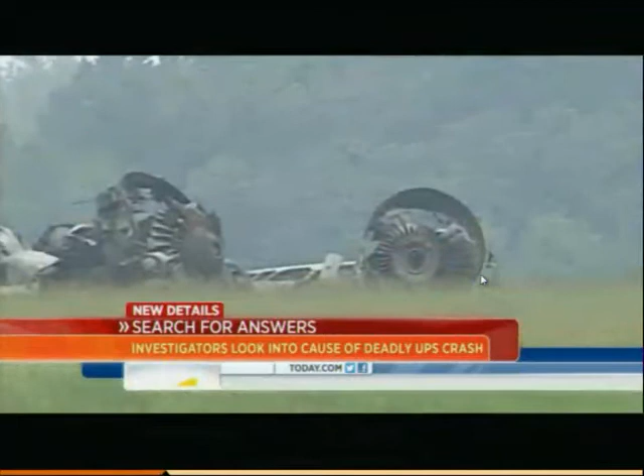Quiet, please. The NTSB was unable to retrieve the black boxes yesterday because the plane was still smoldering, but they hope to retrieve them this morning and fly them back to Washington for analysis. In the pre-dawn sky in Birmingham, fire and smoke as UPS cargo flight 1354 crashed and burned roughly half a mile short of the runway. The pilot and co-pilot never made it out alive. Seconds before the crash, witnesses thought they heard the engines sputtering or backfiring. It flew so close to our house, when we heard the bang it shook the house. So it was quite terrifying. I seen the sky lighting up orange. When I seen the plane on fire, I thought he's not going to make it. The tower reports no distress calls from the pilots. The fire that consumed the aircraft, intense. We have not been able to get in and get the black boxes, the cockpit voice recorder, the flight data recorder. Investigators hope those recorders will help them understand what went wrong. The plane involved was an Airbus A300 built in 2003 with just 11,000 flight hours, logged over 6,800 flights. The A300 was first built in 1972.

While it generally has a good safety record, there have been dozens of incidents and accidents worldwide involving hundreds of fatalities, including the crash of American Flight 587 in New York in 2001. Among the questions for investigators: did the cargo shift on the UPS plane? A cargo shift was blamed on a cargo plane crash in Afghanistan earlier this year. And was the crew well rested? New FAA pilot rest requirements only apply to airline pilots, not cargo pilots. Regardless of what kind of airplane you're flying, fatigue is fatigue, and the same sorts of protections need to be in place, and that includes the cargo industry. In a statement, UPS says we place utmost importance on the safety of our employees, our customers, and the communities we serve. Investigators will also be looking closely at the cargo itself that was being carried. Did it contribute to the crash in any way? Three years ago, a UPS crash in Dubai was blamed on a shipment of lithium batteries that overheated and caught fire in flight. So there's still many more questions this morning, far more than answers, and UPS is promising to fully cooperate with the investigation.

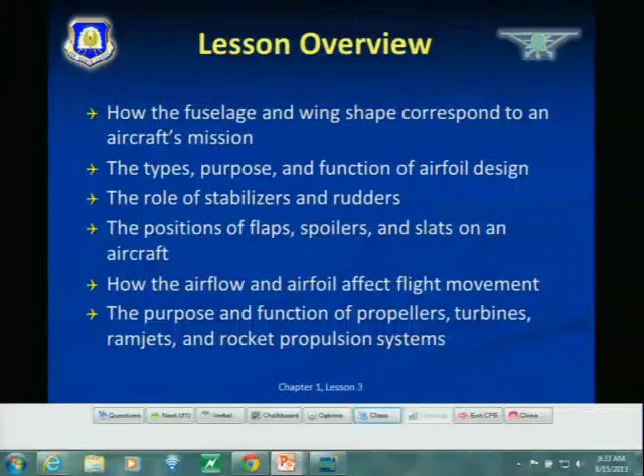Overview here. We can go through the different parts of the aircraft, why it flies and how it flies as far as lift, drag, thrust, and weight. But now we're going to see how you adjust the aircraft to optimize those forces of flight. We're going to talk about what a spoiler is, or a flap, and how it changes the aircraft shape to optimize the flight.

Here's one of the first things you need to know: the fuselage. The fuselage is the main body of the aircraft.

Let's look over here at the wall at all those aircraft I have up there. What is the weirdest looking fuselage of all those aircraft? The left one, the B2, the bat wing. That looks pretty cool. What about the Wright Flyer? Yeah, the left one. Not much of a fuselage.

One of the unusual things about the Wright Flyer is that when you deal with other aircraft, the elevator that controls the up and down motion, the pitch, is in the back of the plane. Back of the plane. But the first Wright Flyer has it in the front of the plane. That was one of the only differences in their plane versus ours. It made it more unstable, very pitch sensitive, since the front of the plane had the pitch control, which is kind of unusual. So you're actually landing and pointing forward. Also, there are no flaps and no spoilers on here.

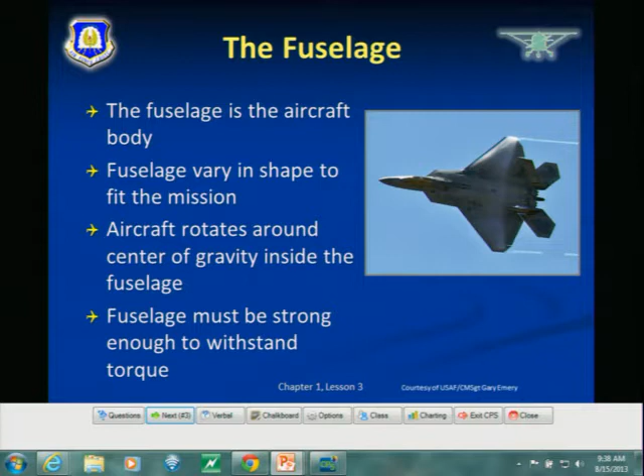That's a good question. What is torque? What does that word mean? Twisting or rotation, exactly. When it says the fuselage must be strong enough to withstand torque, how much torque does a cargo plane coming in to land have? Not as much as a fighter, right? A fighter is going to be turning and bombing and dropping stuff off the plane. So the fuselage does have to withstand a lot of the movement of the entire aircraft.

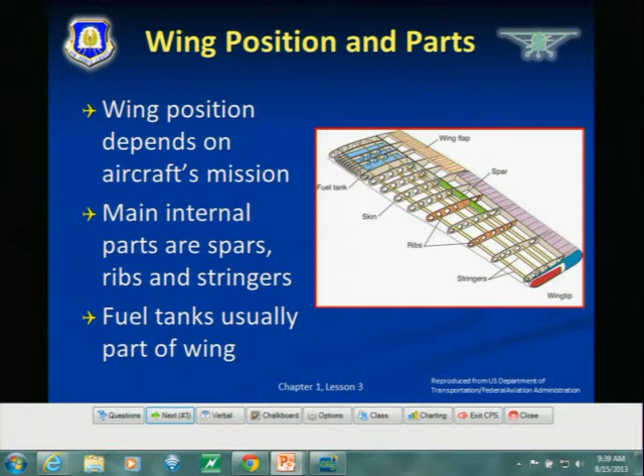If you look at some of these planes up here, like the B-2, look how skinny it is—all those wings have fuel in them. Look at the C-47 on the Berlin airlift in the middle. If you're carrying cargo in the fuselage, there's no other place to put the fuel than in the wings. The air refueling planes have huge tanks in the cargo area which transfer fuel out to the planes they're refueling.

Wing size. How does wing size affect the weight, guys? If it's a really light plane, it doesn't have to have big wings. Exactly. So then if you have a lot more weight, your wings have to get bigger, right?

And how about a glider? Why does a glider have big wings then? The bigger the wing, the more lift you have. Bigger wing, more lift. Does anybody here do gliding? Have you ever glided? We actually had some glider pilots in our cadets years back. The longer the wings, the more the lift. A glider needs big wings because there's no engine.

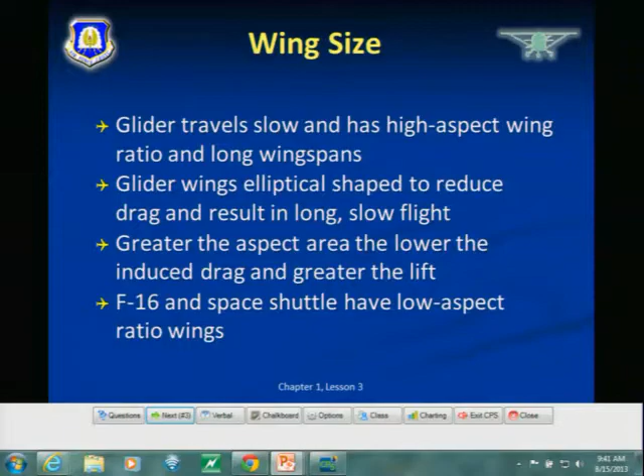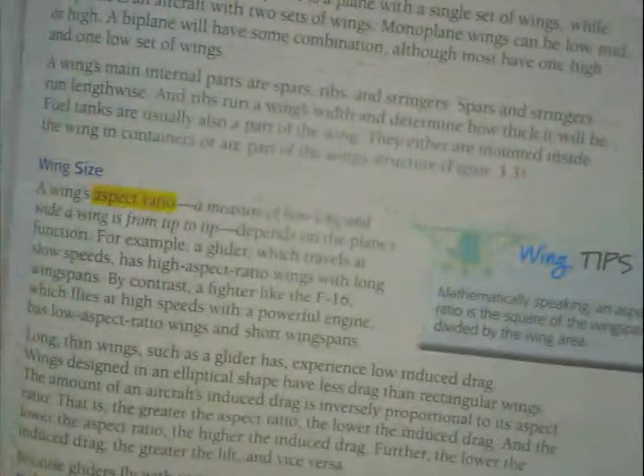Page 39. What does aspect ratio mean? Aspect ratio is a measure of how long and wide a wing is, from tip to tip. And the bottom line is the greater the aspect ratio, the greater the lift.

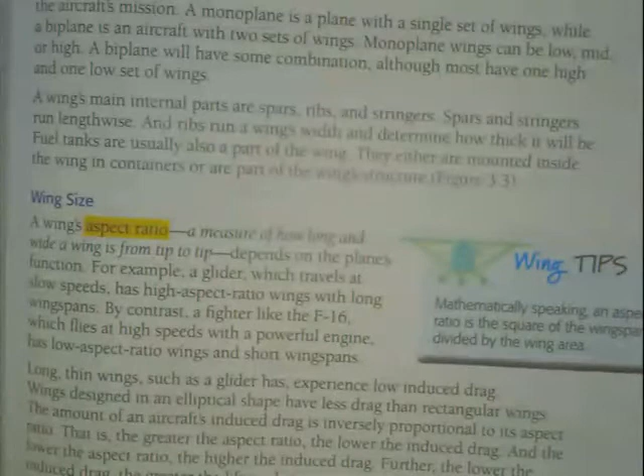So if you have an F-16 that has a low aspect ratio and that engine turns off, how far can it glide? Not very far, like a rock. Okay, the F-16 glides like a rock. It falls out of the sky.

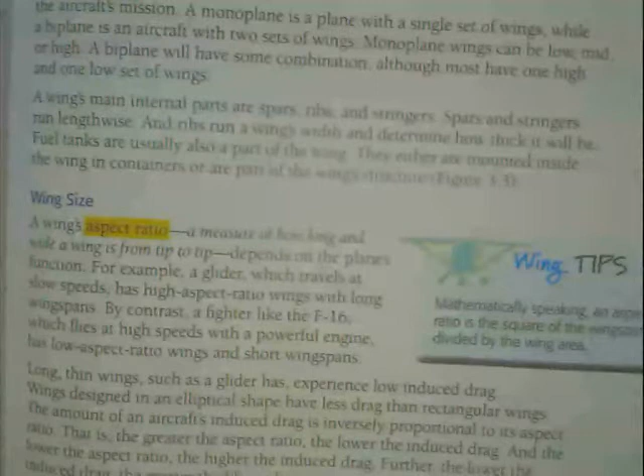But if you have a high aspect wing, like a glider, it glides forever. So when you're flying, especially a single seat, single engine plane like a Cessna—I flew a lot of Cessnas—or an F-16, you do need to know the glide angle. So if your engine turns off, can you make the airport? Can you make a field?

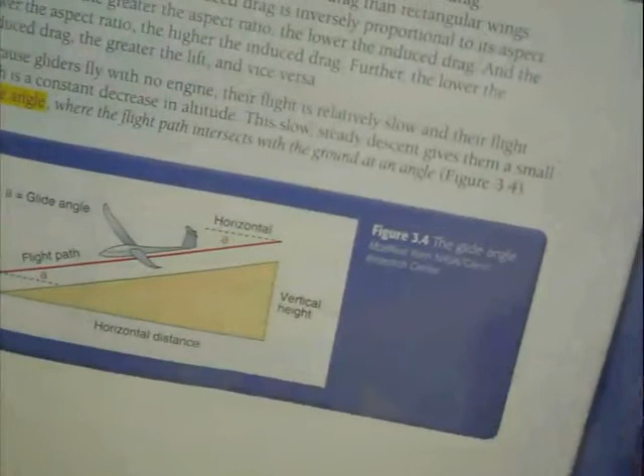When you're flying in a Cessna, a civilian airplane, down at the bottom of page 39—I don't know if you can see that there—that actual picture is your glide ratio for that plane. And you need to know that: if I'm 10,000 feet high, or 2 miles high, how far can you glide? They'll tell you in your owner's manual.

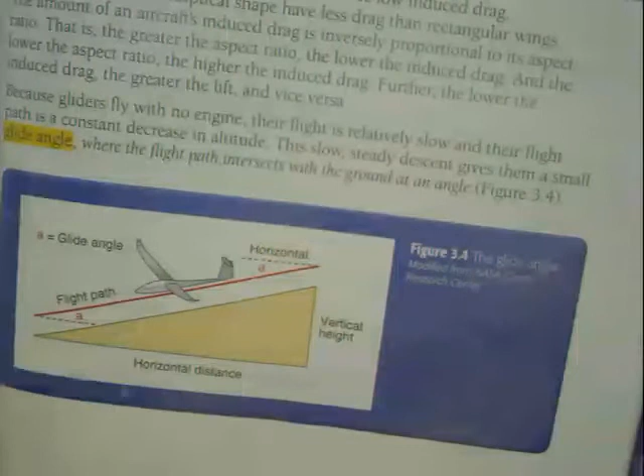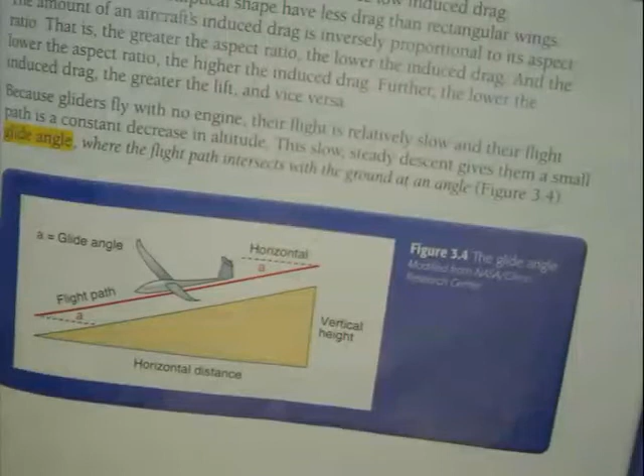You may be able to glide basically, say, 4 miles for every mile you're high. So maybe if you're 2 miles high, you can glide 8 miles. That helps you land, or pick out a road or a field to land in if your engine turns off.

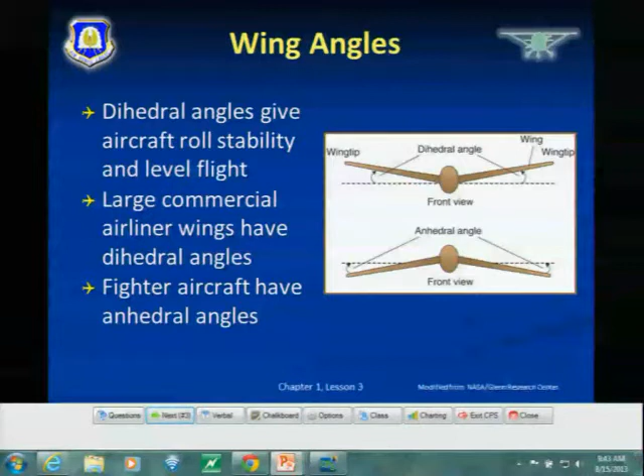Okay, wing angles, page 40. Dihedral. What about the big Airbus that crashed? What kind of angles on the wings do you think the big planes would have? What'd you say—dihedral? Good job, listening. Yep, dihedral, because you care about being level and stable. You don't want your customers to drop their coffee cups when you're flying.

But when you're in a highly maneuverable plane, a fighter like an F-15 or F-16, you're going to have an anhedral angle because you're going to be very, very maneuverable, and basically you're unstable. You're unstable because you don't care about keeping everything smooth and gentle—you're going to be flying upside down a lot. I don't think I ever flew one mission in the F-15 where you didn't go upside down, because you're trying to engage other planes or drop bombs.

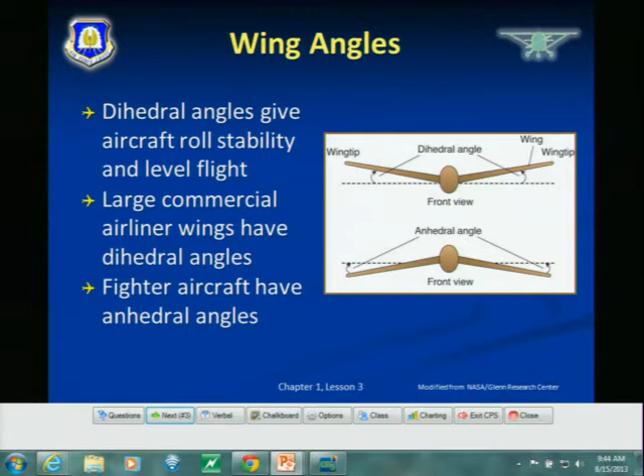So those are basic wing angles. Airfoil camber—what does camber mean? Cadet level, what does camber mean? We learned that last lesson. Camber is curve—remember, camber's curve. You were talking about chord. Okay, chord, that's okay, that's okay. So the aircraft camber, shown in the picture up here, is the curve of the airfoil, which gives you the low pressure on the top.

All right, good job, hoorah! Maybe give us a grade for the whole class for that, right? Did everyone get it right? Almost 14. Did I tell you guys, if y'all ever answer these questions and the entire class gets it right, that I stand up and do a jig and turn around and dance? Last year I think I did it twice, right?

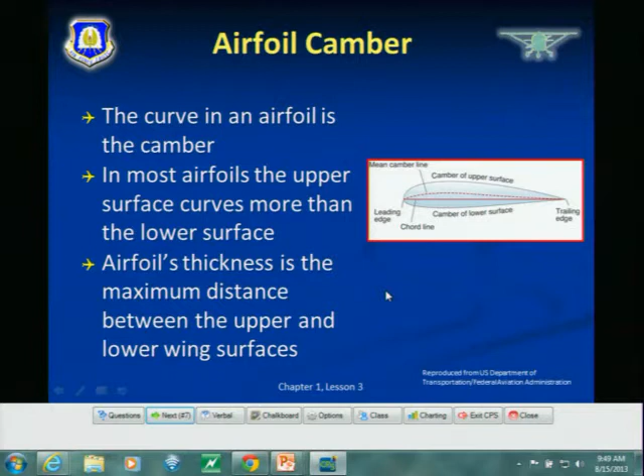It's kind of scary, right? It's kind of scary of me doing this.

All righty, we talked about airfoils. We went over the fact that your camber, your chord, does affect the actual moving air. You have more lift if you have concave lower surfaces.

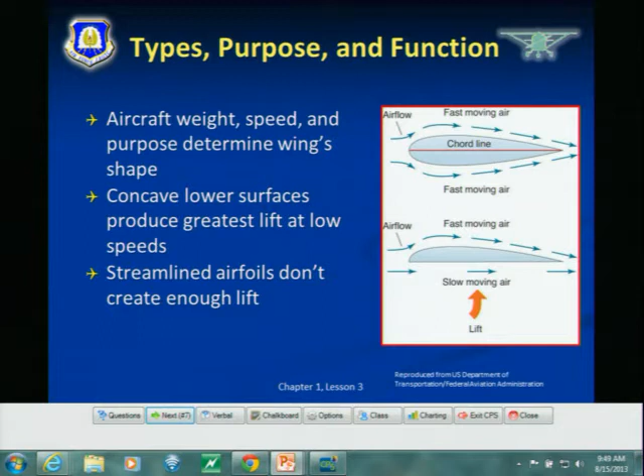Parts of the aircraft, you need to know this to graduate from this class, just like the forces of lift. Go to page 45.

You need to know the different flight movements that an aircraft can have. Everybody hold their hand out. If you move the aircraft up, what's that called? Up? No, it's called pitch.

So if we sit there and move our hand up, that is called pitch. If we move our hand like this, what is that called? Roll. And what if we go left and right? It's called yaw. And there are flight control surfaces - pitch, roll, yaw - that control every one of those.

Look on our picture here behind my head. Oops, I got black behind my head. Okay.

When you see something called a rudder, put your hand up, Mr. Cody, because you can't keep your mouth shut. Here we go, Mr. Rhodey. Now, what does the rudder do? What movement of the aircraft does the rudder control? Yaw. Everybody give a round of applause.

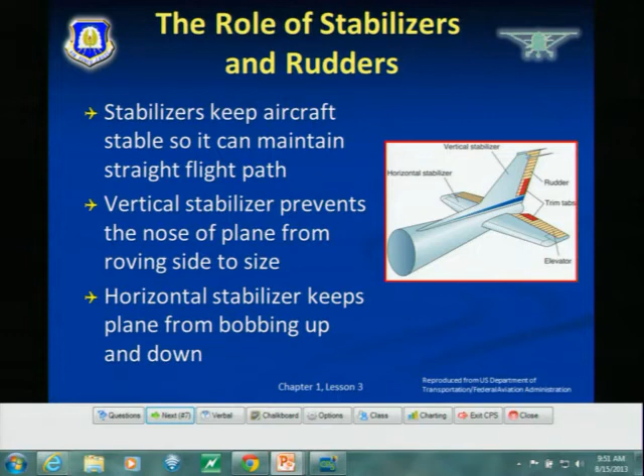So pitch is the elevator, yaw is the rudder. But what about something called - is it Friday? What is this? What is that called? Roll. What causes the aircraft to roll?

Trim tab? Well, trim tab is sort of like an autopilot, we can get there, ask him about it in a second. But the flaps, technically, are on the wings when you slow down.

There is something else called an aileron. Everybody say aileron. And actually, if you look at this picture behind me, the ailerons are on the outside of the wings.

Okay, ailerons. If the relative wind is coming in and this flight control surface goes up, what's going to happen to this wing? It goes down, and the aircraft will rotate this way. So if the relative wind comes up here and this aileron goes down, so there's more drag on the bottom, what's going to happen to this wing? It'll go up. So it's kind of opposite of what you think.

All right, so I remember when we got to fly the plane. You went on one of my flights? Yeah, I remember how when we turned or rolled, it always went opposite - if this went up, this went down.

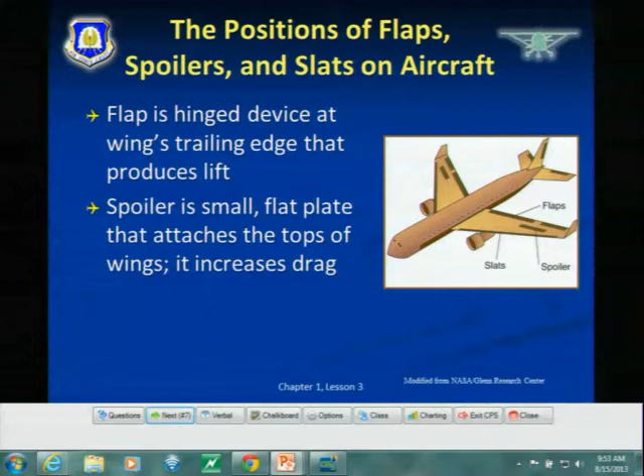That is called split ailerons. It never happens in a Cessna, but it has happened in fighters. I've had one of those happen. It's an emergency - you just come home and land. You hope that doesn't happen to you, because that's kind of a bad day.

All righty guys, we have 1 minute for you to take out a piece of paper and write down A through J. That's going to take more than a minute. We have G, you may use your book - these answers are right there in your book. Why don't you do this with your shoulder partners? Look on page 45 and 44. I'll give you 2 minutes, starting now.

Alright, so, okay, A through what? Got it? Y'all see it?

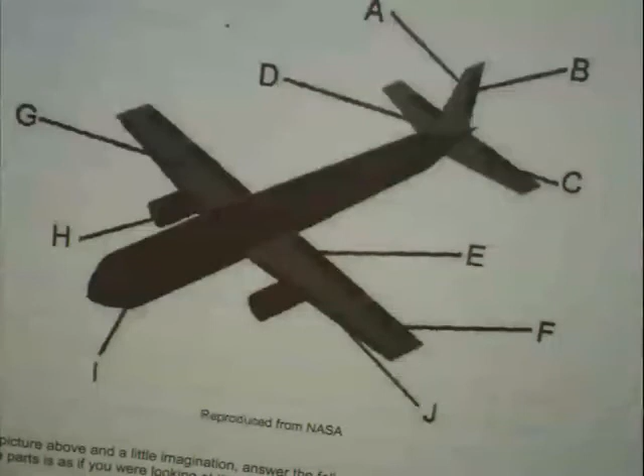A-I-L-E-R-O-N is on the outside of the wings. What's the ones on the inside of the wings? Flaps, flaps. You're going to cover all this good.

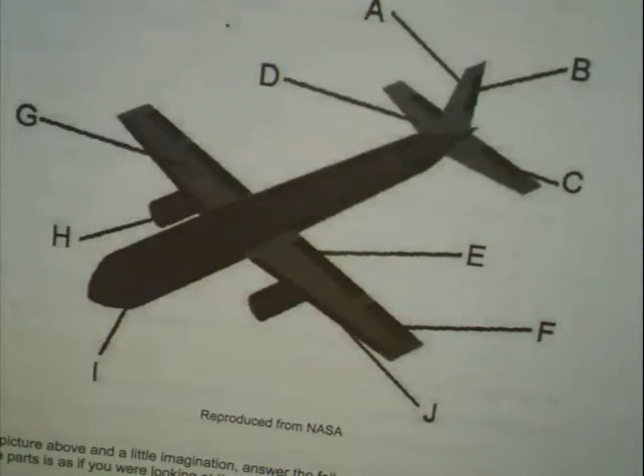Okay, 3, 2, 1, stop. Now let's look at the answers. What is A, guys? Fin, yes. What's B? Rudder. What's C? Elevator. What's D? Horizontal stabilizer. Ooh, that's tricky, tricky, tricky.

What's the difference between a C and a D? The letters, sir, the letters. The difference between a horizontal stabilizer and an elevator - what is the difference there? That's tricky, this is advanced. Yes sir, elevators move. What now? Horizontal stabilizer stabilizes the plane from rolling, and an elevator causes the pitch to go up and down. Basically close, but not quite. Basically, the C is a small thing of the D.

Okay, and look at it - the D does not move, and the C does. So that's basically what you said. It stabilizes it, the horizontal stabilizer.

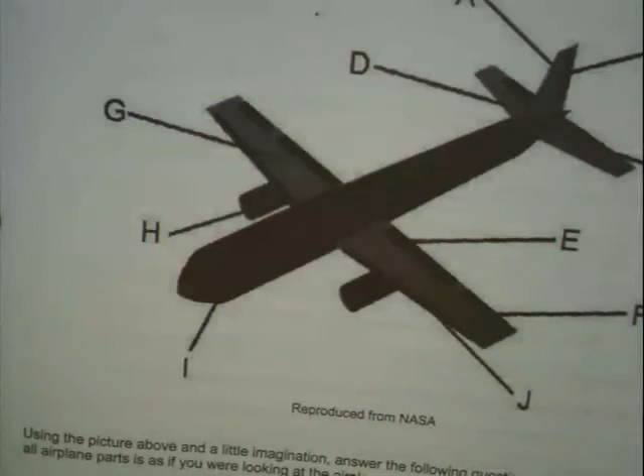Look at the A and the B. What's the difference between the A and the B besides the letter there, Cody? The rudder moves, right? The rudder moves. Okay, all right, E. What's E?

Flaps, great. What's F? Aileron. Excellent. G. Spoiler. G, spoiler. Wing, slats. G. Wing. Wing.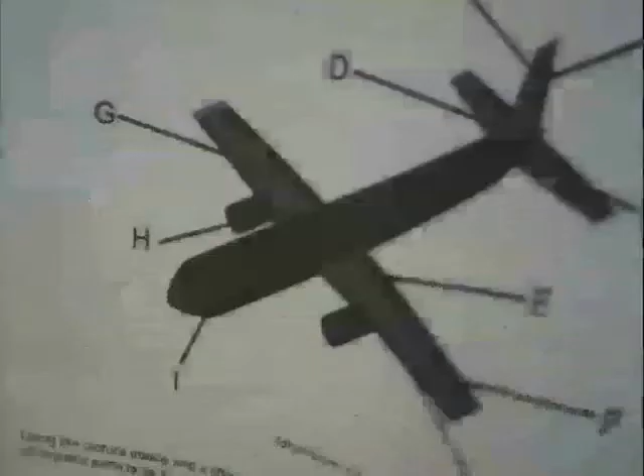Okay, we're going to go over that. A slat changes the airfoil of it. Alrighty, excellent. Everybody pull out the clicker - let's finish up with a clicker and we will be up to propulsion.

We did this one, next. All right, quiet, quiet, quiet. Maybe I should turn on some Jimmy Buffett while y'all do this. Yes, sir.

Maybe I should work to get this screen over there so you can see it. Would that help out a little bit? Yes sir, or maybe - should I slide to the left? Yes, great job. Oh, I didn't get the answer. But I'll slide over here. How about that? Is that better for some of you guys? Can you guys see? You guys can. Yeah, yeah, yes sir is the answer.